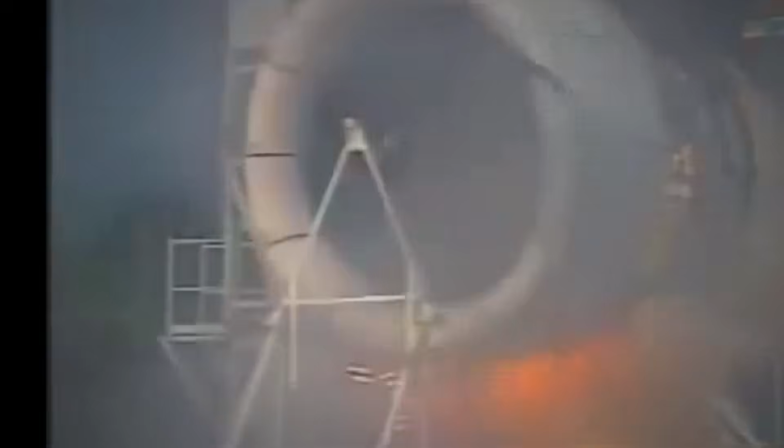That's exactly backwards. That fire isn't the engine dying, it's the engine saving itself. And what makes that possible starts with something about the collision itself that most people never consider. At 300 miles per hour, the bird isn't a solid object.

If you've been sitting near the wing during a bird strike, you know what it sounds like. Not a splat, not a crunch, a single sharp bang, a metallic thud that vibrates through the floor and into your armrest. What's happening behind that sound is stranger than the force alone.

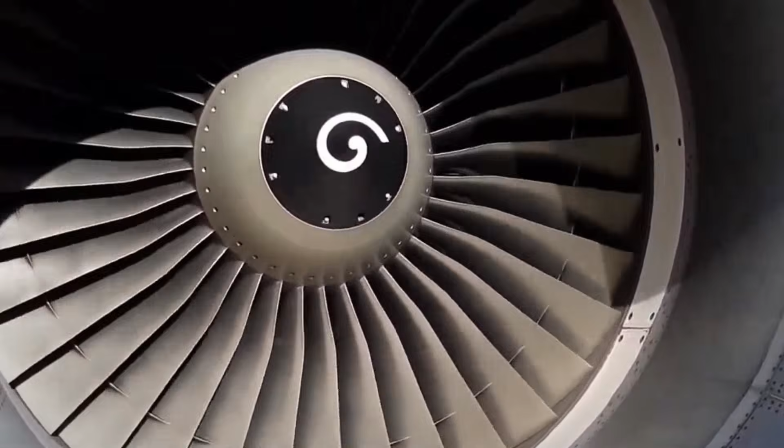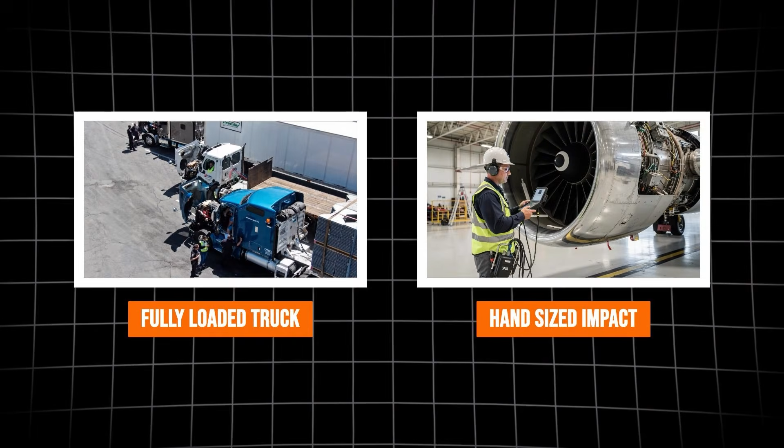A Canada goose, one of the most common large birds near airports, weighs about 8 pounds, roughly a gallon of milk. When that 8-pound bird meets a fan blade at takeoff speed, it generates over 70,000 pounds of force on a single blade. The weight of a fully loaded semi-truck concentrated onto an area smaller than your hand in under 2 milliseconds, about 150 times faster than you can blink.

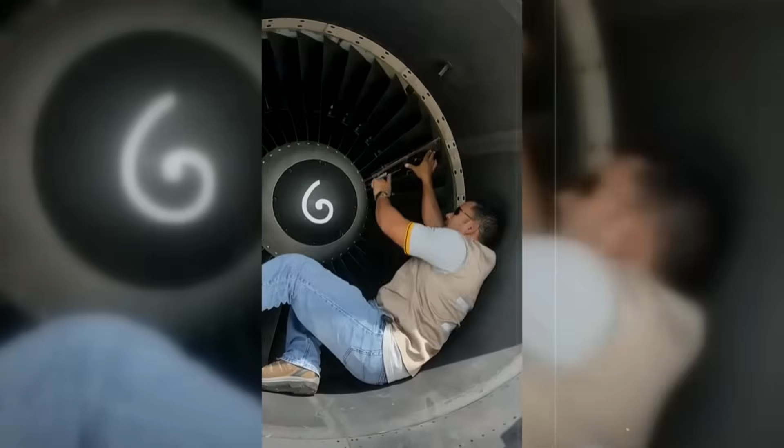70,000 pounds sounds like it should snap any blade ever forged. And if it does, the problem doesn't end with one broken blade. A multi-ton fan disc spinning thousands of times per minute with a blade suddenly missing becomes catastrophically unbalanced, enough vibration force to tear the engine from the wing.

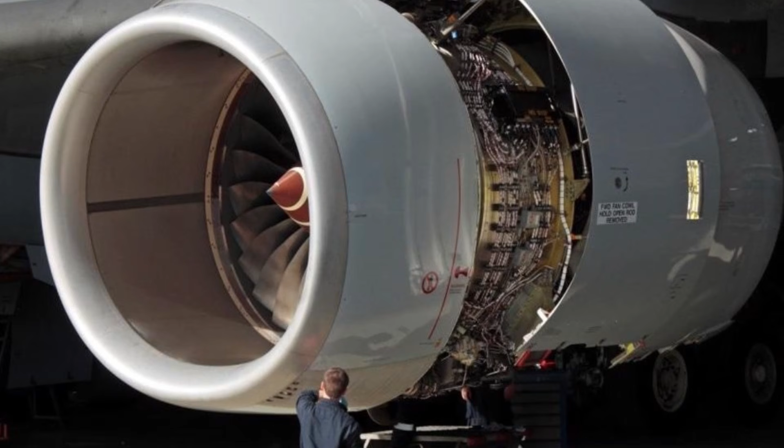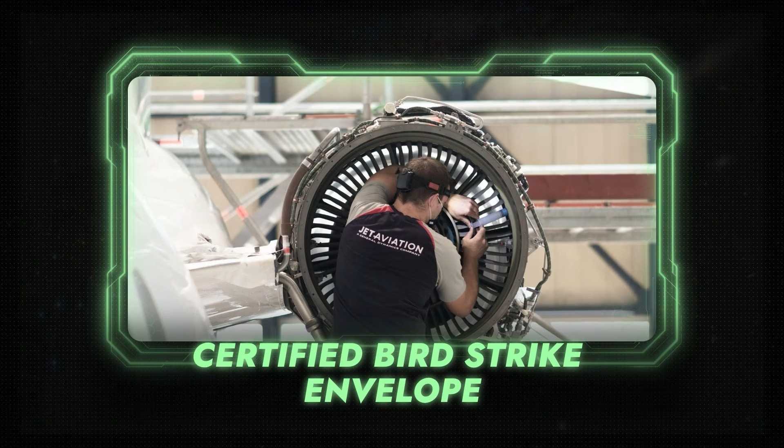The force only gets worse with speed. Kinetic energy scales with the square of velocity. So a 20% increase in airspeed doesn't add 20% more force. It adds closer to 50%. That speed limit of 250 knots below 10,000 feet also happens to keep aircraft inside the engine's certified bird strike envelope, in the exact altitude band where most birds fly.

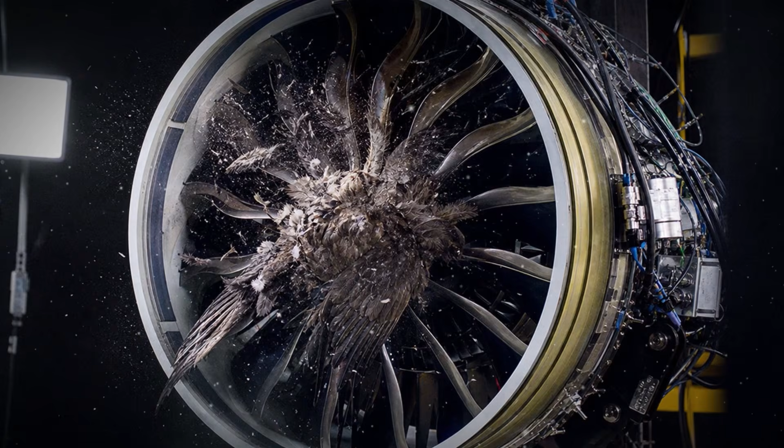But the force isn't the strangest part of this collision. At 300 miles per hour, the bird doesn't behave like flesh and bone. The impact forces so completely overwhelm the structural integrity of biological tissue that the bird stops acting as a solid object. It effectively behaves like a dense balloon of water detonating against the blade surface.

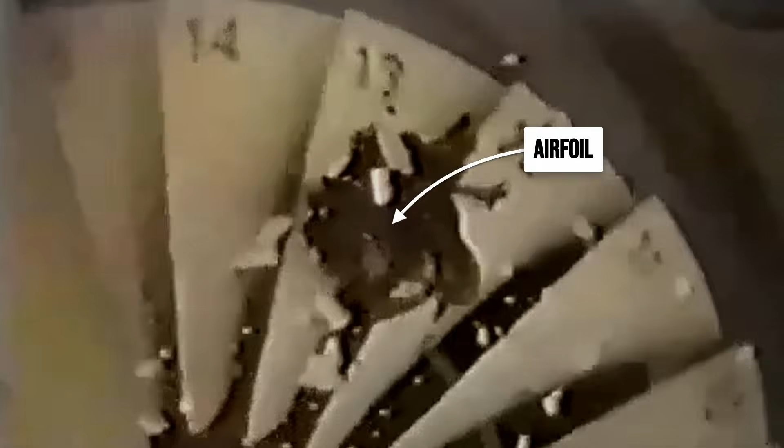In the first microsecond of contact, the fluid decelerates against the airfoil, generating a localized pressure spike in the tens of thousands of psi. Then the liquid spreads, flowing outward across the blade at hundreds of miles per hour. Calling an animal a fluid sounds like physicists' shorthand. It's the actual design parameter.

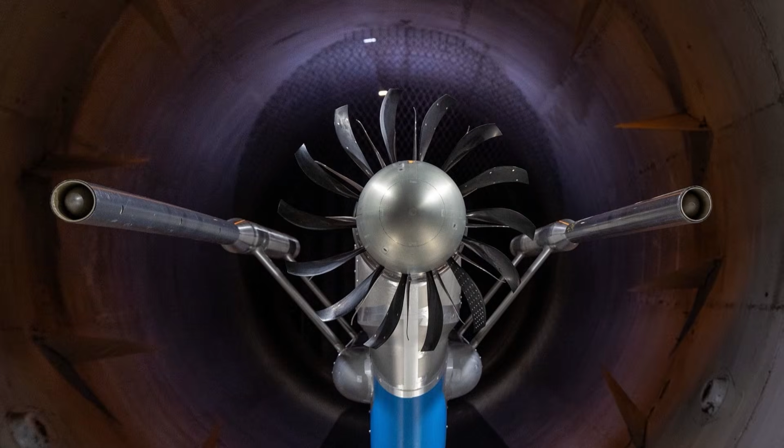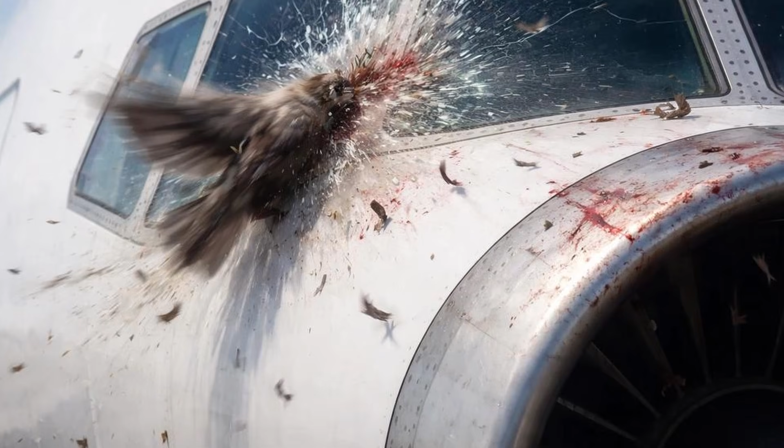The Wilbeck model, the standard mathematical framework for bird strikes, developed in the late 1970s and still in use, treats the bird entirely as a hydrodynamic projectile. At these velocities, bones and beak provide essentially zero structural resistance. The blade isn't facing a solid impact, it's facing a fluid shockwave, and that distinction drives every material choice and every countermeasure inside the engine.

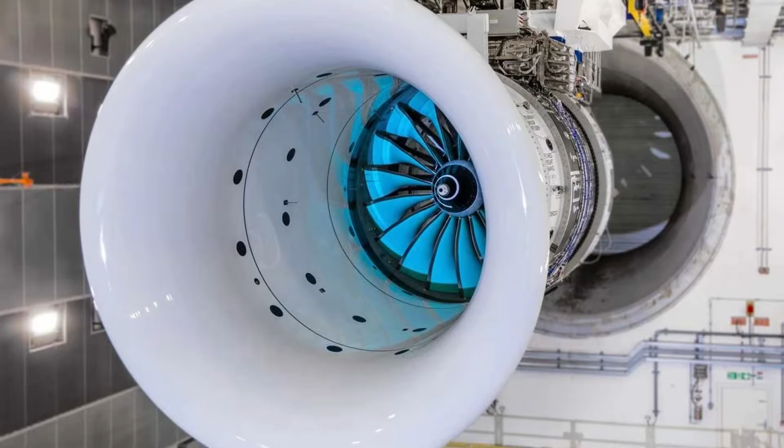Most people picture a jet engine as a high-speed blender. The massive fan blades spin fast enough to chop the bird apart. The remains get incinerated in the combustion chamber, and the engine keeps running. That mental model feels right because it matches everything you've experienced with spinning blades: blenders, lawnmowers, propellers. And the fan blades do slice through the bird.

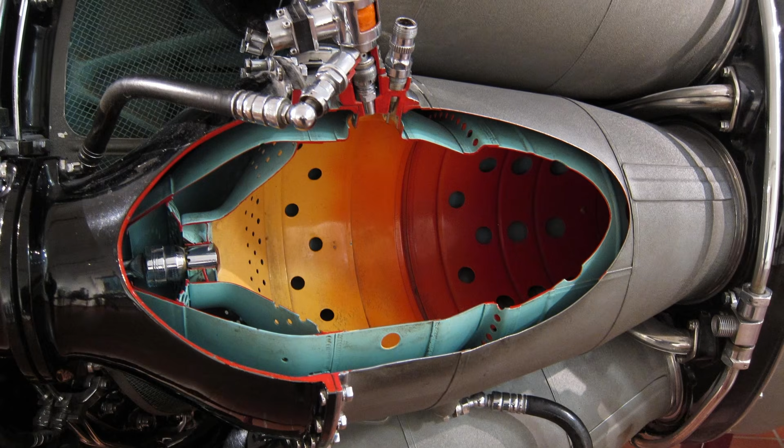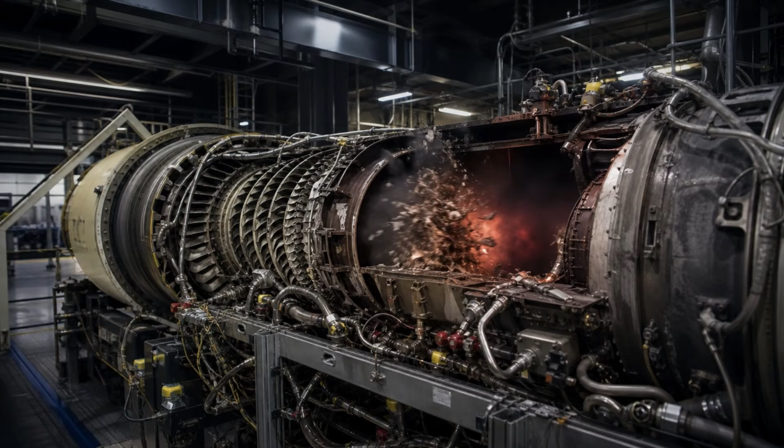That part is accurate. But biological material reaching the combustion core doesn't burn up harmlessly. It chokes the engine. It displaces the oxygen the combustion chamber needs, disrupts the carefully balanced airflow, and can extinguish the flame entirely. The bird reaching the fire isn't survival. It's how the engine dies.

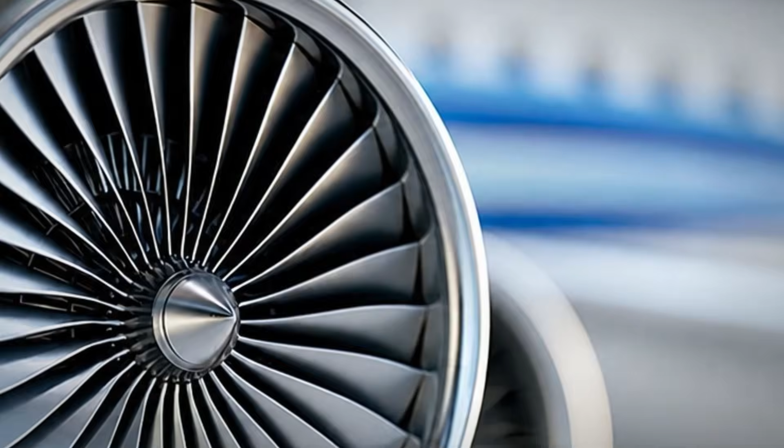And the blade itself? If it were solid metal, rigid, dense, unyielding, that fluid shockwave would snap it. Rigidity concentrates the entire force at the point of contact. The blade fractures into shrapnel. The engine doesn't survive by overpowering the bird. The actual engineering works differently, and it starts with something visible from your seat at the gate. Next time you board and glance into the engine, look at the fan blades.

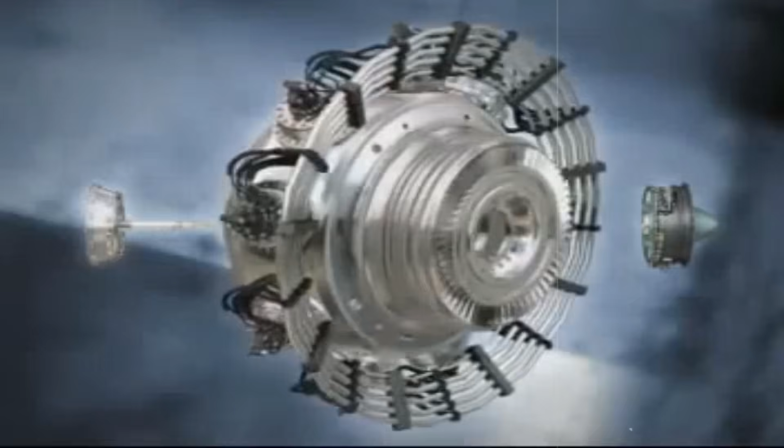That silver leading edge catching the light is titanium, or on newer engines, hardened steel. Its job is to slice incoming fluid and protect what's behind it. The dark matte surface curving behind that leading edge is carbon fiber, and the reason it's there traces back to one of the most expensive lessons in aviation history.

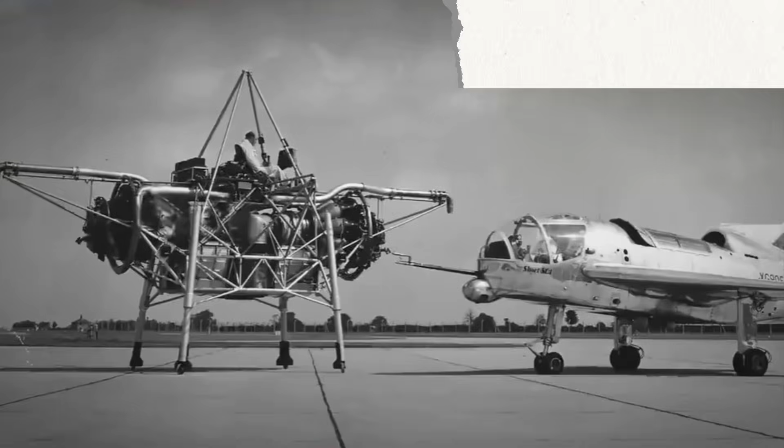In 1968, Rolls-Royce tried building the first composite fan blades for their RB211 engine. They were lighter, allowed a bigger fan, and performed perfectly under normal flight loads. Then engineers fired a bird at them. The composite layers peeled apart on impact, delaminated, shattering the blades, and destroying the engine core. The failure nearly bankrupted the company.

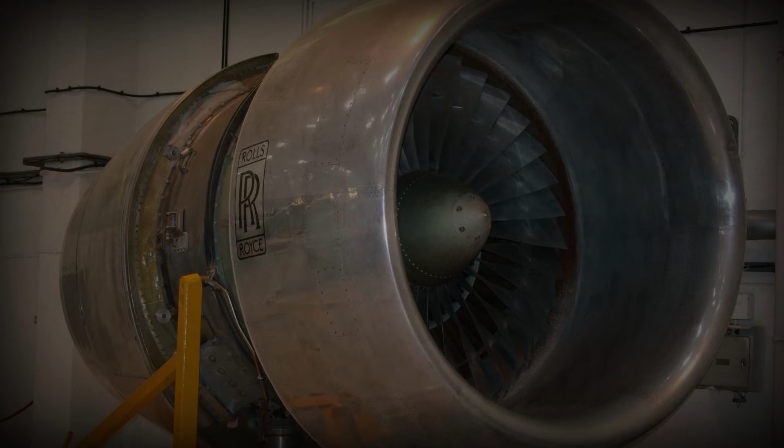The problem wasn't carbon fiber. It was the architecture. Early composites were laid in flat, two-dimensional sheets. A hydrodynamic shockwave hit those sheets, and they separated like pages in a wet book. The fix took decades. General Electric cracked it first, certifying the GE90 with composite fan blades in 1995.

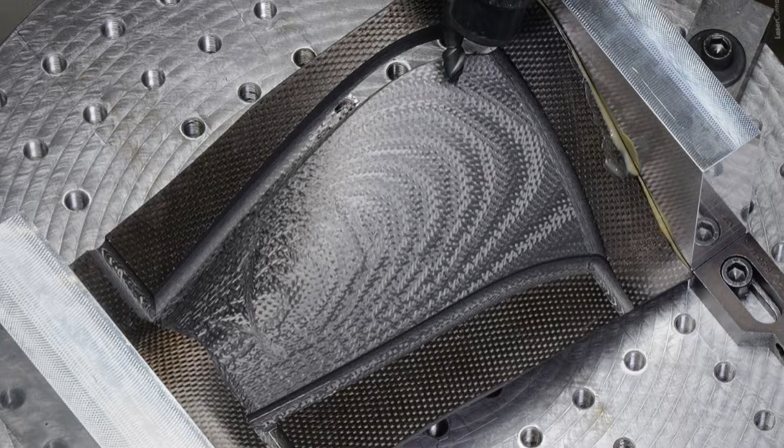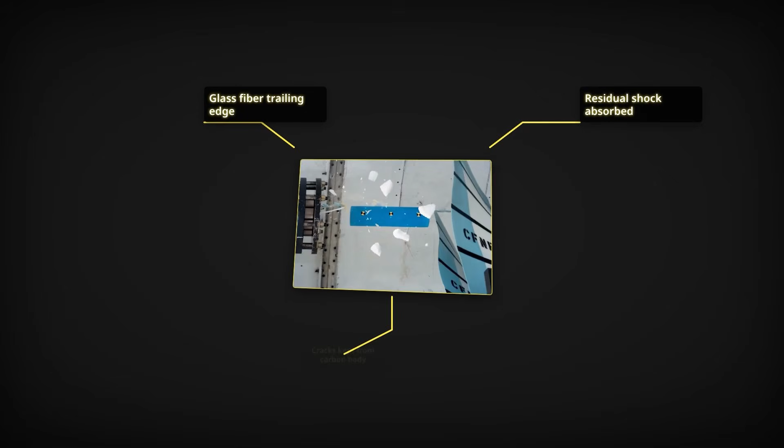On the newest generation, the CFM Leap, the GE9X, the architecture went further. Carbon fibers are woven in 3 dimensions using industrial looms, locked together through the full thickness of the blade so they physically cannot peel apart under impact. A glass fiber trailing edge, softer and more flexible than the carbon structure, absorbs the residual shock and prevents cracks from propagating into the main blade body. The titanium leading edge distributes the initial fluid hit.

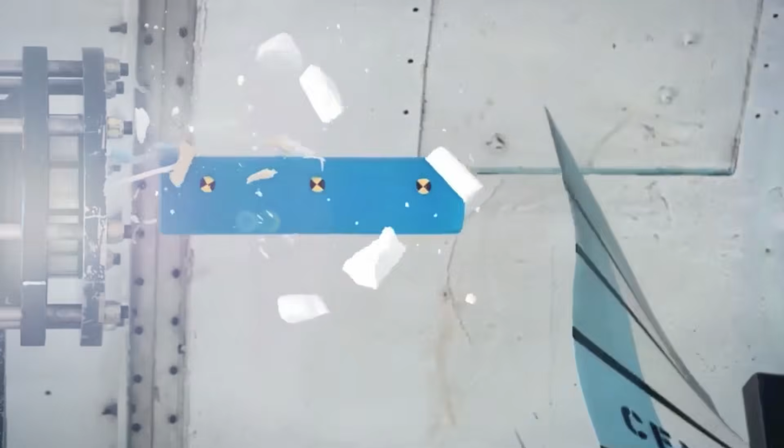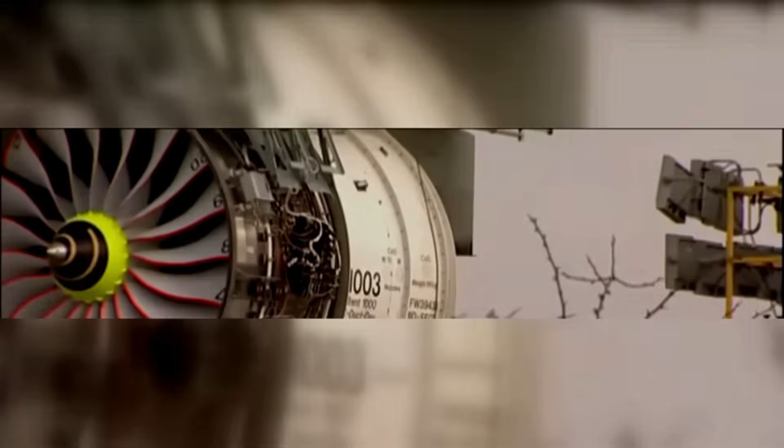The result? The blade takes 70,000 pounds of hydrodynamic force, flexes, absorbs the energy across its full span, and springs back. In over 100 million flight hours on GE composite fan blades, not a single one has failed from a bird strike. But surviving the hit is only the first problem. The shredded fluid is now inside the engine, and if it reaches the combustion core, the engine flames out. So the engine sorts it.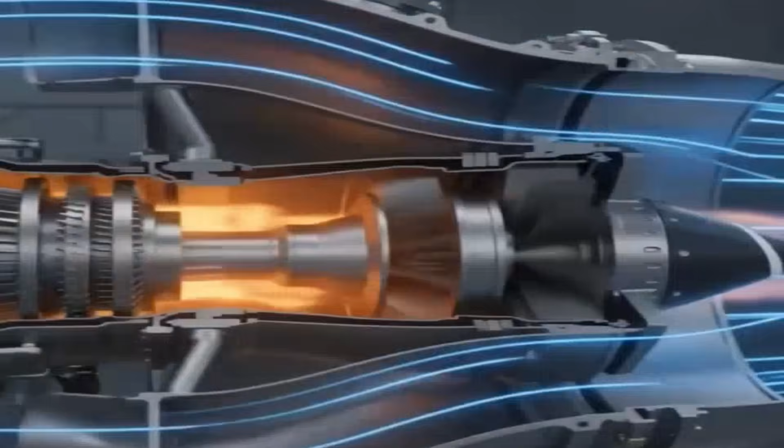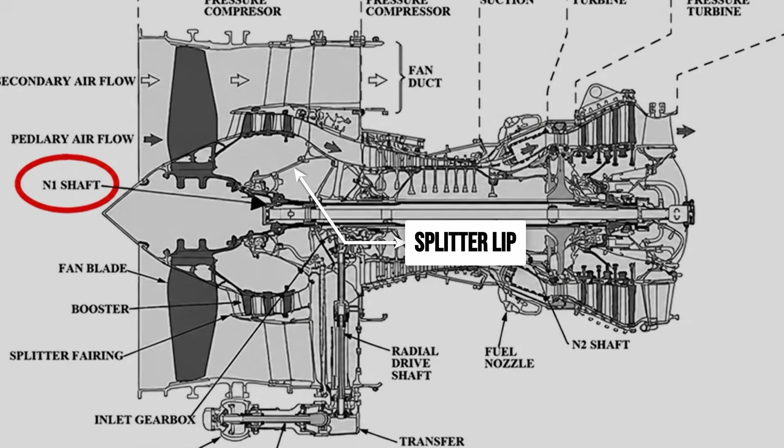Modern turbofans push 90% of their intake air through a wide outer duct that wraps around the core. Only 10% enters the core where fuel actually burns. Just behind the fan, a structural ring called the splitter lip divides these 2 paths. Because the liquefied bird is far denser than air, the spinning fan flings it outward. Centrifugal force handles the separation. The heavy debris enters the bypass duct and exits the rear of the engine without ever reaching the combustion chamber.

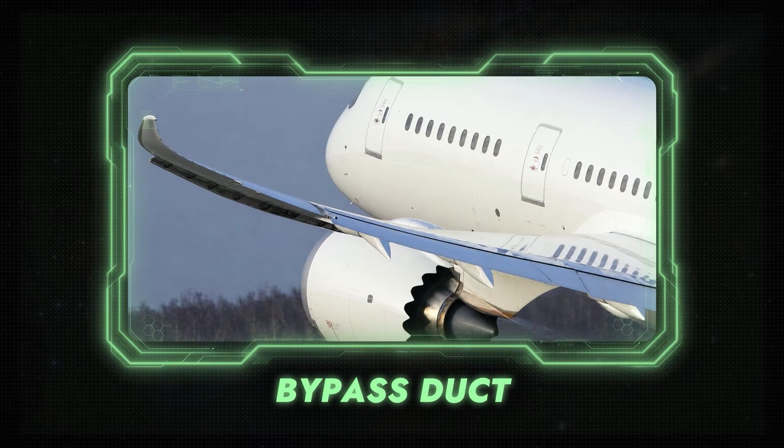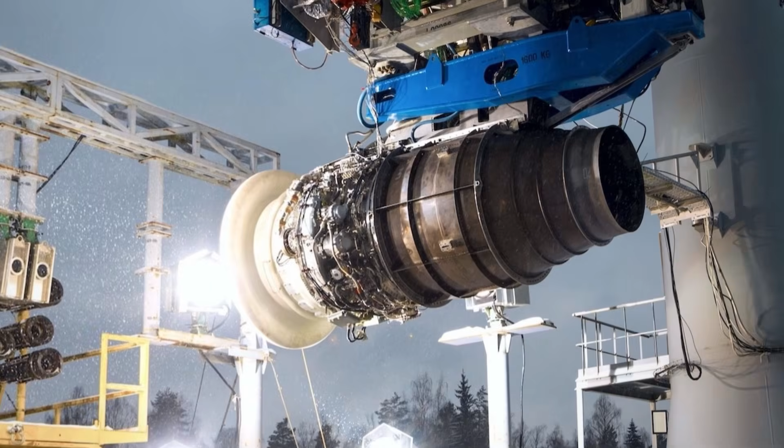That bypass duct wasn't designed for bird strikes. Its primary purpose is fuel efficiency. Routing air around the core generates thrust more economically than forcing it all through combustion, but it doubles as the most effective biological debris separator ever engineered. Everything covered so far, blade flex, centrifugal sorting, handles the bulk of the impact. But centrifugal separation isn't perfect, and the engineering that manages what slips through is where the real sophistication lives.

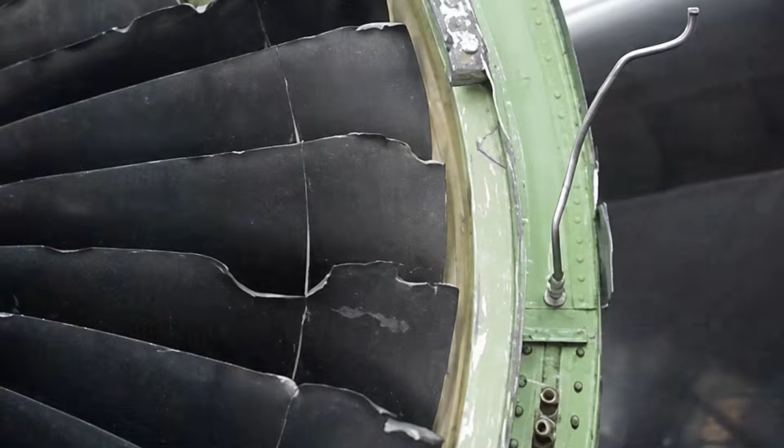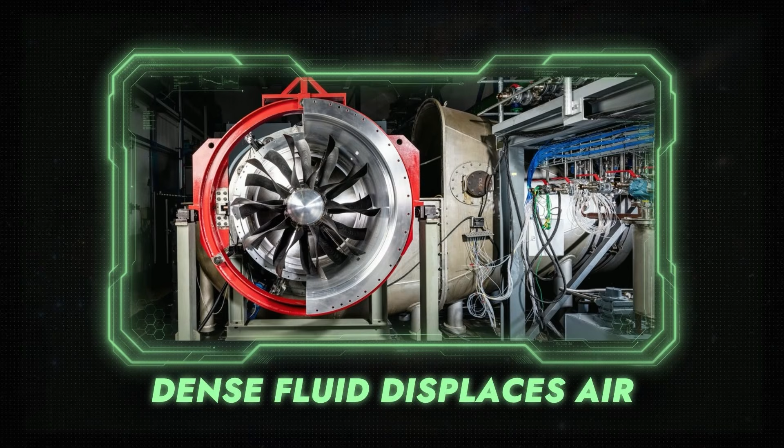A fraction of the fluid, especially from a large bird, inevitably enters the core. That's why passengers sometimes catch a sharp, acrid smell through the overhead vents moments after a strike. And that fraction triggers the most dangerous phase of the engine's survival. The dense fluid displaces the air entering the high-pressure compressor. The compression ratio, normally above 30:1, collapses. With too much fuel and not enough oxygen, the airflow reverses violently. Engineers call it a compressor surge.

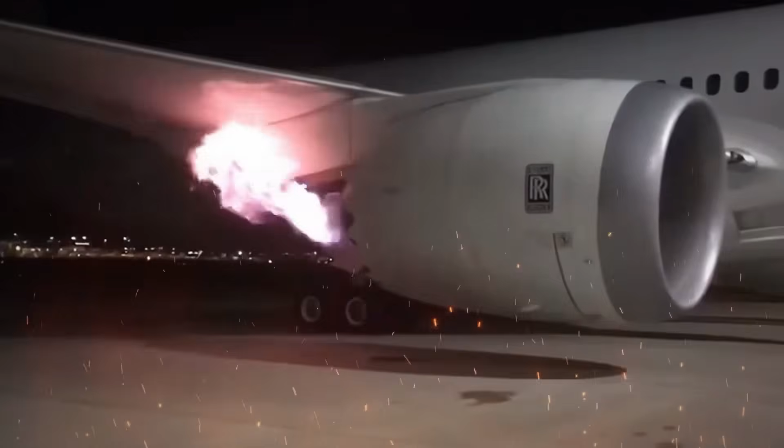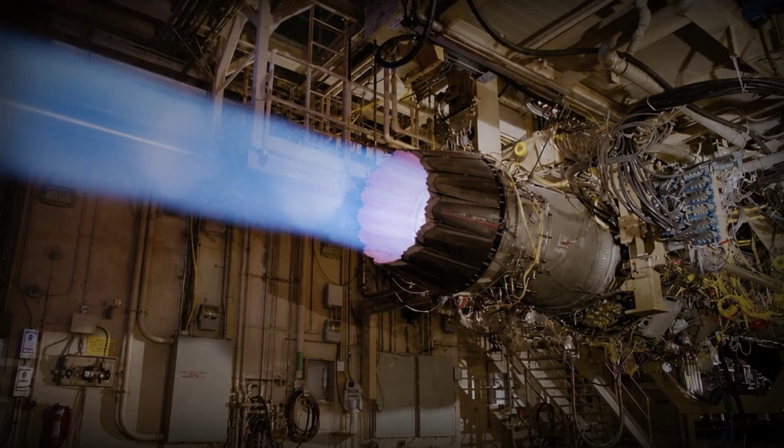Excess fuel ignites as it blasts out the exhaust. That's the fireball passengers see from the window. Excess fuel, igniting because the combustion chamber suddenly can't burn it fast enough. From a window seat, that distinction feels academic. Fire is fire. But to the engine, it's the difference between a recoverable disruption and total failure. Left unchecked, the surge would kill the engine in seconds.

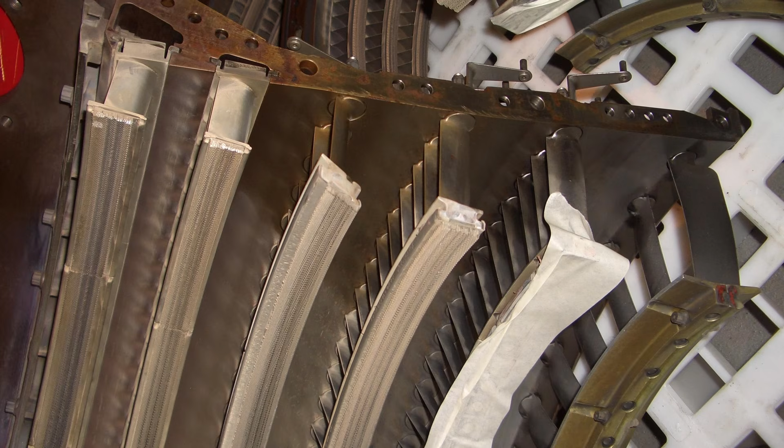But the engine's central computer, the FADEC, detects the pressure drop and the temperature spike within milliseconds. It pivots variable vanes inside the compressor, changing the angle at which disrupted air meets the spinning blades.

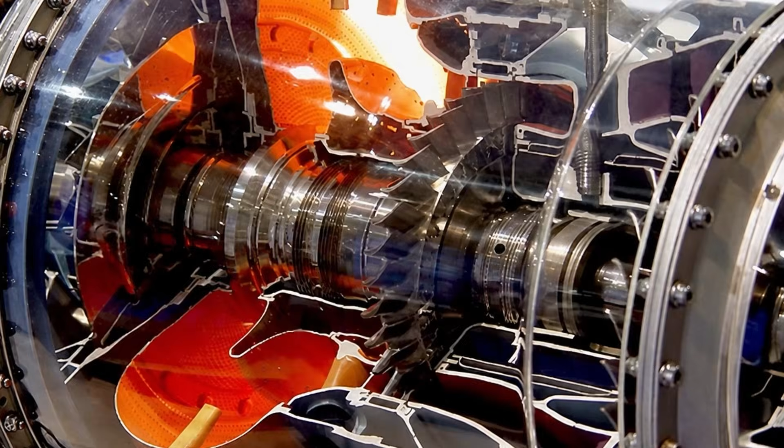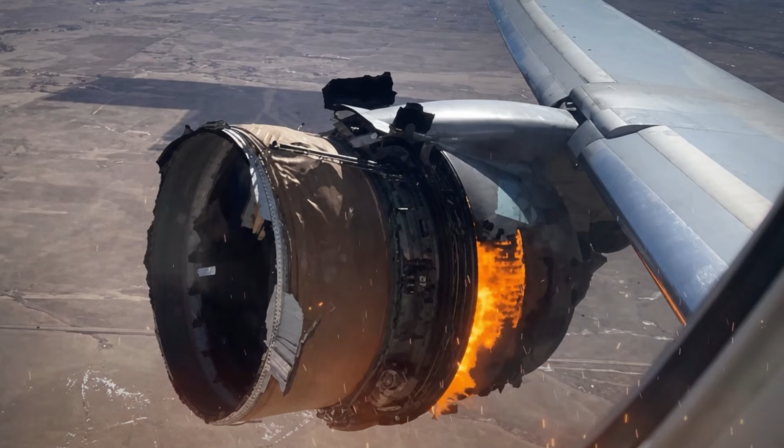It opens bleed valves to vent the surging pressure into the bypass duct, forcing the engine to cough out the blockage. And it fires the igniters continuously, keeping the combustion flame alive until the airflow stabilizes. From first pressure drop to stable flame, less than a second. From the cabin, it sounds like a series of explosive bangs and looks like the engine is coming apart. What's actually happening is a computer clearing an aerodynamic blockage before your brain can process what went wrong.

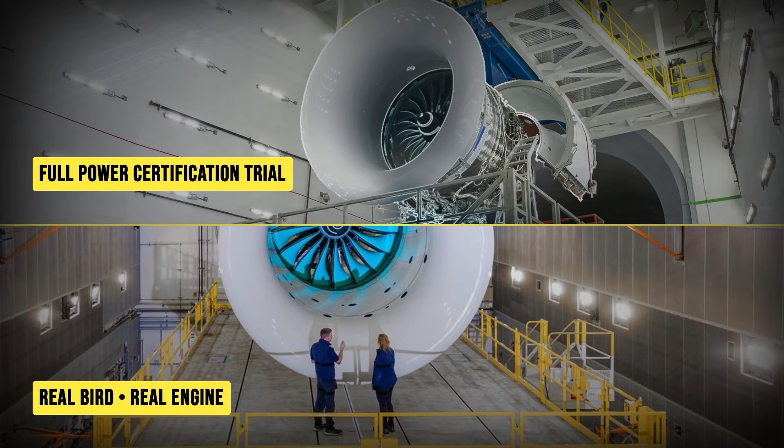Before any engine carries passengers, it has to prove it can survive all of this. Not in a simulation, but in a reinforced test cell, with a real bird and a real engine at full power. The device is exactly what its nickname suggests. The chicken gun, a pneumatic cannon aimed at the intake of a fully operational engine running at maximum takeoff thrust, firing euthanized birds at speeds matching takeoff velocity directly into the spinning fan.

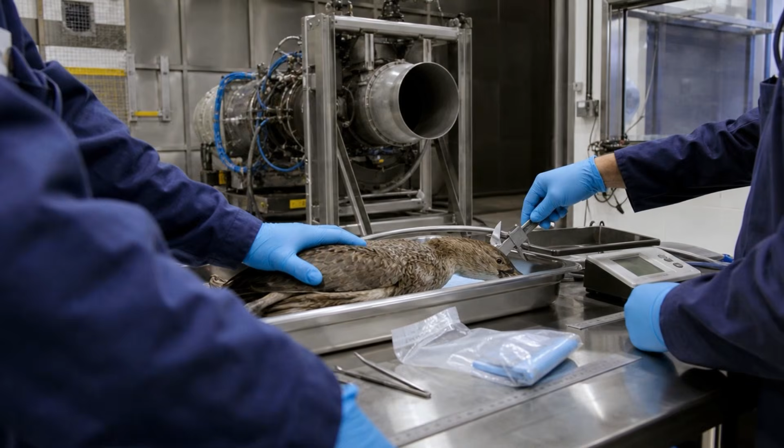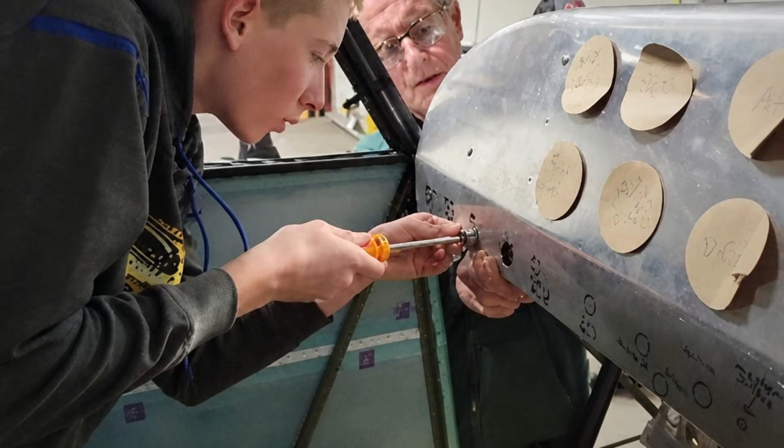The bird must be thawed. A frozen bird behaves as a rigid solid, delivering a concentrated, shattering impact that doesn't replicate the fluid dynamics of a real strike. A thawed bird accurately reproduces the hydrodynamic shockwave of a live collision. Testing facilities regulate the core temperature of every surrogate to ensure the physics match. The certification standard, FAR 33.76, scales the required bird weight to the engine's intake area. The largest engines must survive an 8-pound bird without shedding shrapnel, without internal fire, without uncontained failure.

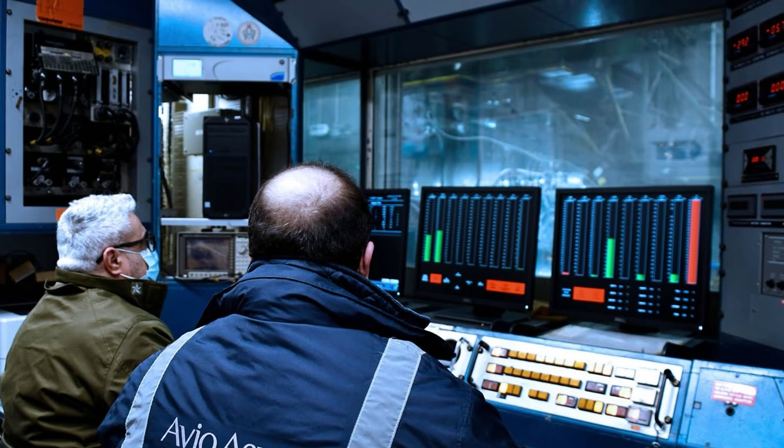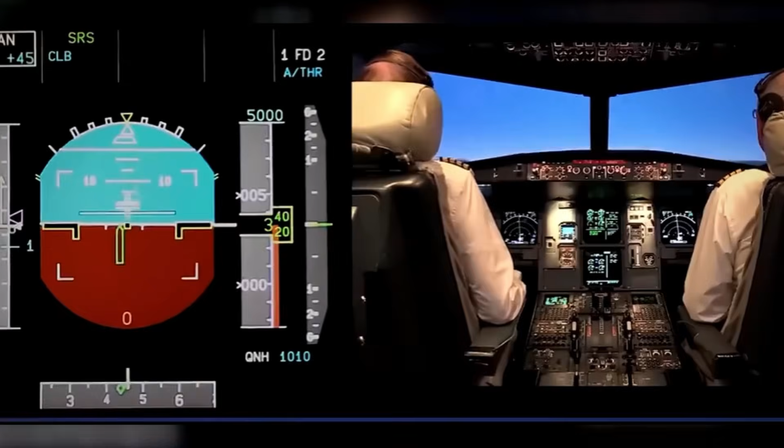But surviving the initial impact isn't enough. After a flocking bird ingestion, multiple birds fired in rapid succession, the throttle cannot be touched for 2 full minutes, simulating the time a crew needs to assess the emergency. Then the damaged engine must complete a 20-minute flight profile, varying power settings replicating a climb, a hold, an approach, and a go-around, the full sequence a crew would fly to bring a damaged aircraft back to the runway. If the engine can't finish, it doesn't get certified. Those certification limits exist because reality found the boundary.

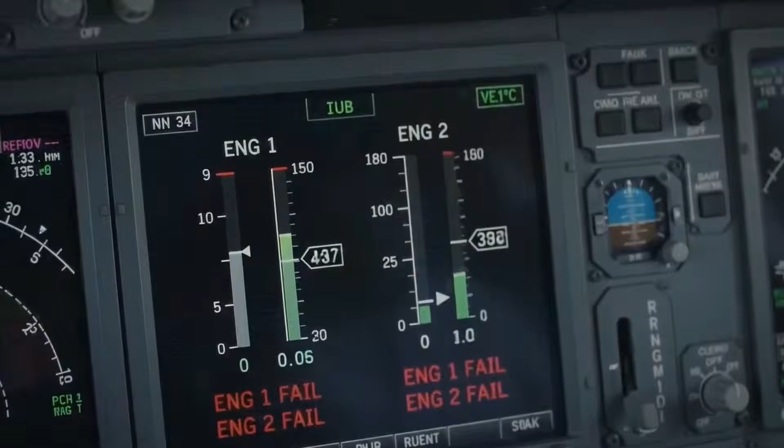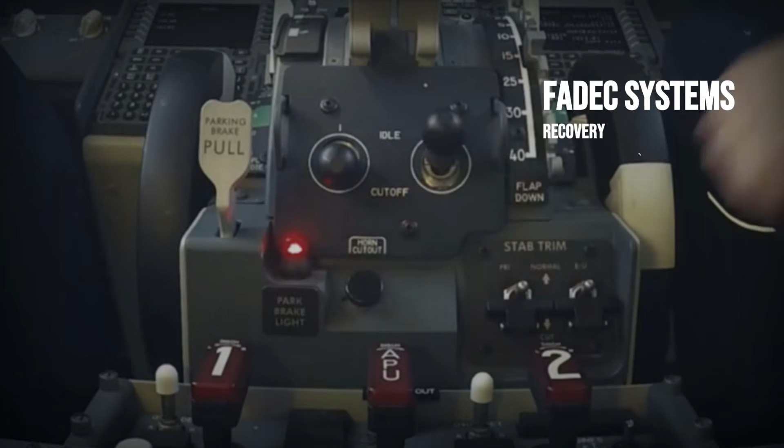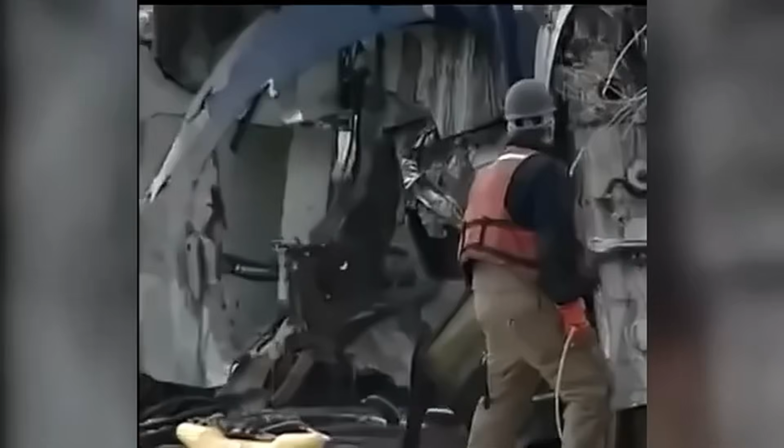On January 15, 2009, U.S. Airways Flight 1549 hit a flock of Canada geese at 2,800 feet, 90 seconds after takeoff from LaGuardia. The geese weighed between 8 and 10 pounds each. Both CFM56 engines ingested multiple birds simultaneously. Every system responded. The centrifugal sorting worked. Both FADECs detected the surges and attempted recovery. But the sheer volume of dense fluid overwhelmed both bypass ducts at once. The compressor blades deformed. The variable stator vanes, the ones the computer needed to pivot, bent. The internal geometry the FADEC depended on was physically destroyed.

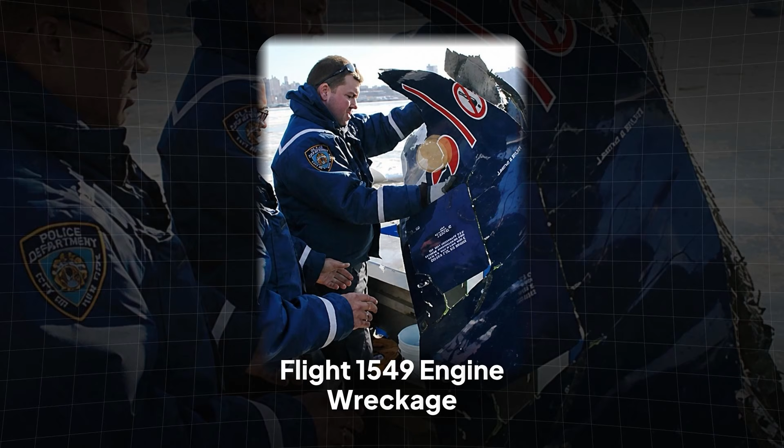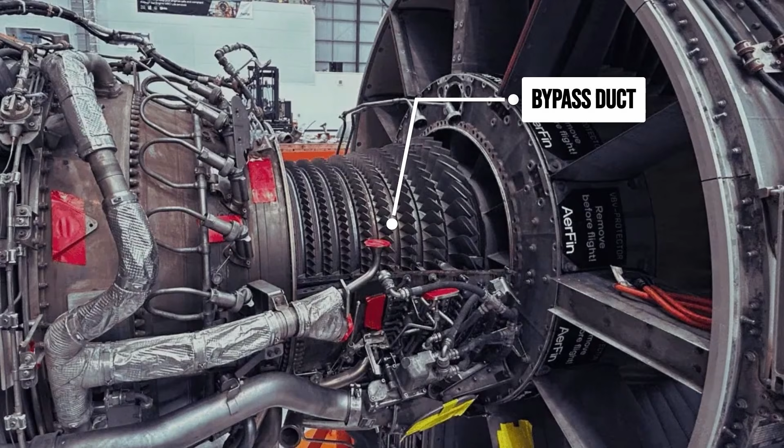Both engines flamed out. What followed, the unpowered glide, the ditching in the Hudson, all 155 people walking off the wings, demonstrated two things simultaneously. The containment held, neither engine sent a single fragment of shrapnel into the cabin or the wing fuel tanks, and the engineering had a hard physical boundary: when the fluid volume exceeds what both bypass ducts can sort at once, no software intervention recovers it.

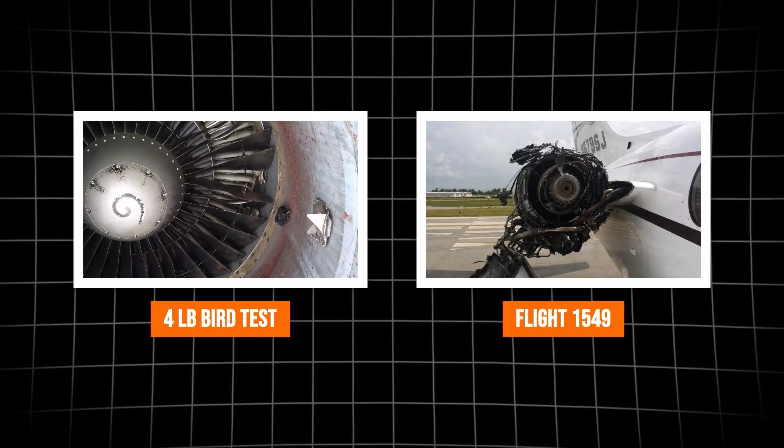Every major certification update since has pushed that boundary further. The required bird weight doubled from 4 pounds to 8 pounds. Run-on requirements expanded. But the lesson stands. The engine is engineered to survive the strike, not to be invincible.

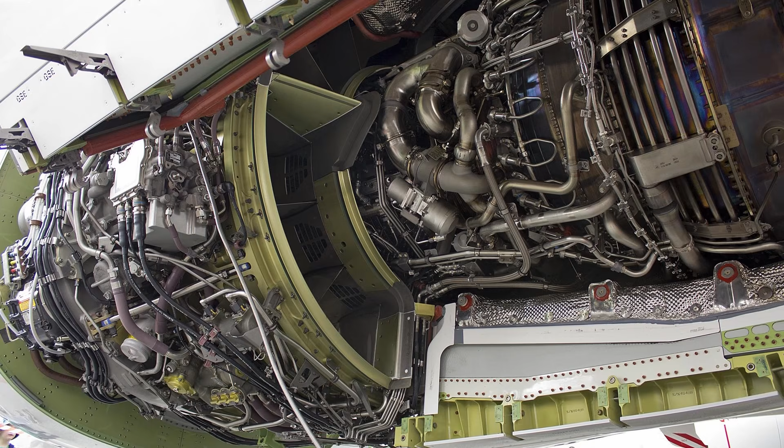Next time you're walking down the jet bridge and you glance into that engine, silver leading edge, dark composite body, the wide nacelle housing a duct that doubles as a centrifuge, you're looking at a system built to survive a 70,000-pound fluid shockwave without breaking apart. Behind the blades, a bypass duct sorting debris by density at thousands of RPM. Behind that, a computer fast enough to reshape the engine's internal geometry before your brain registers the bang.